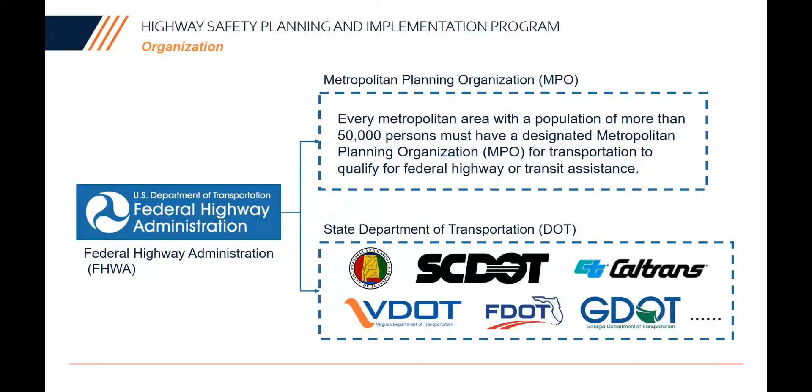So what is highway safety planning? Basically, FHWA, the Federal Highway Administration, requests state DOTs to develop a strategic highway safety plan, and MPOs, Metropolitan Planning Organizations, can develop a specific transportation safety plan. Every metropolitan area with a population of more than 50,000 people needs an MPO. It basically develops long-range and short-range transportation plans and helps distribute federal money to transportation projects.

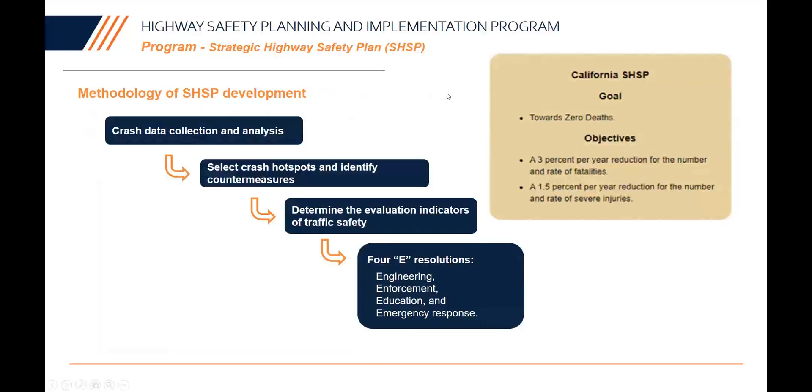Like I mentioned, in this plan they also include driver behavior, distracted driver behavior. So ALDOT actually spent a lot of money investing in the driving simulator study at the University of Alabama. They did a lot of study and training for teenage drivers, distracted driving, how unsafe it is. So that's based on this statewide plan. And you see how the plan is linked to university research.

So another one: if you only have a plan, with no funding, no money to implement the plan, the plan is basically useless, right? So the FHWA actually has a program called the Highway Safety Improvement Program. This program has a budget of about $2 billion US dollars per year. This money is distributed to all the state DOTs, and they use the money to do improvement projects.

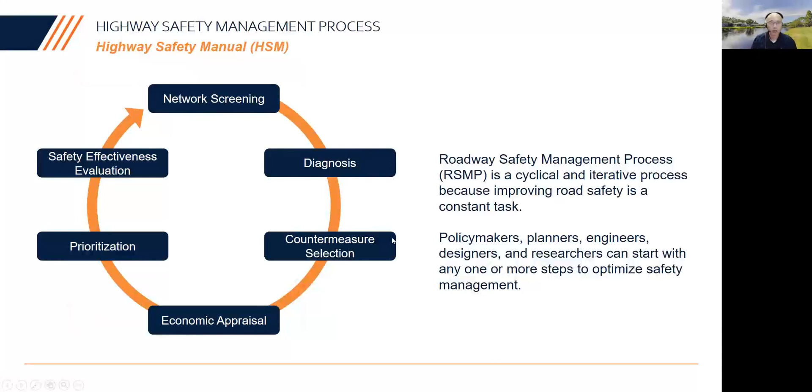The highway safety management process includes this circular process: network screening, diagnosis, countermeasure selection, economic appraisal, prioritization, and safety evaluation. It's like a circle, and as a researcher you can help with any step of this process. For example, if you develop a model to help network screening, or a research paper evaluating a countermeasure, that can help them select the right countermeasures. So this is how research helps the highway safety management process.

So everything I've talked about so far is about planning, the ways of funding, and how these connect. After you understand this planning process and the Highway Safety Improvement Program, where the money comes from, this can help you conduct your traffic safety research. A lot of traffic safety research is performed by universities and research institutes, like CUTR at USF, and large ones like TTI, a research institute and consulting firm. Those research questions and funding sources are closely related to highway safety planning.

I'll give an example. University of Alabama at Birmingham received a lot of money for a driving simulator study because they put that in the state strategic highway safety plan. Okay.

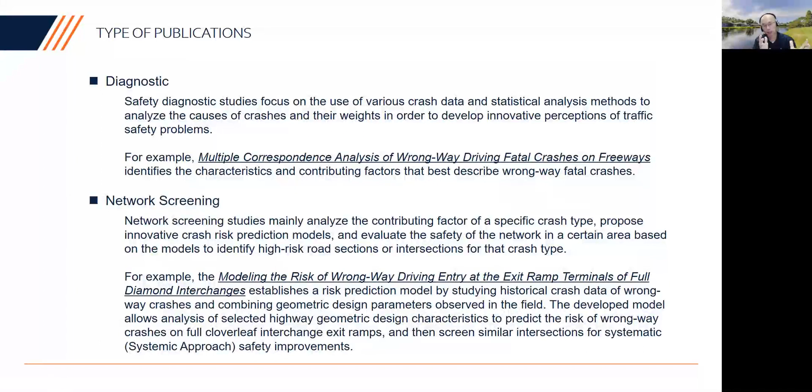So in summary, here I want to mention most of the safety research work. Looking back, I found that it was conducted under the framework of highway safety strategy plan and highway safety management process. In general, both state DOT and FHWA funded research projects place more emphasis on the implementation of the results.

Then next, I want to talk about some future directions. I would say this research area is mostly my interest area - it's not necessarily the future for everybody. It's just some future research I'd like to focus on.

First is the highway safety manual. There's a lot of things you can do for the highway safety manual - you can calibrate the highway safety manual method for your state, or develop a predictive model, and develop a CMF factor. There's a lot of things you can do for the highway safety manual, and you can develop a data-driven road safety management process method, develop a data-driven network screening tool, and effectiveness evaluation.

Or using naturalistic driving behavior data to do some safety performance evaluation, like hard braking and speed trajectory. And you can study how drivers behave at stop signs or on curves and things like that.

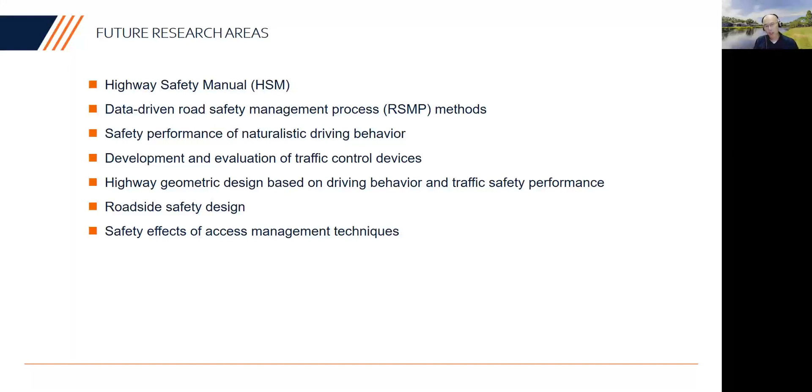And the last one is access management, safety impact. I like to talk about it because every one of these research areas connects with TRB committee.

TRB committee—every time I attend the TRB meeting, I spend most of my time with committee meetings. My first 10 years going to TRB, I spent most of the time attending the sessions and posters, but now I spend most of my time with committees, because committee is the real problem.

They help identify research needs, what kind of research needs to be done. They also stimulate needed research so they can disseminate the research results. They can also identify and share best practice, and facilitate adoption of research into practice.

So the committee—look at the committee members—not a lot from university, a lot from state departments of transportation, a lot of practitioners, and they know what they need. They know their job, what kind of research can be implemented, how to make it useful, converting research to practice.

So these are some standing research committees: traffic control device. I'm now serving as a committee member for the traffic control device committee. This committee deals with a lot of everything—traffic control device, material, installation, operation, maintenance, service life, human factor, and the safety effects of all these devices.

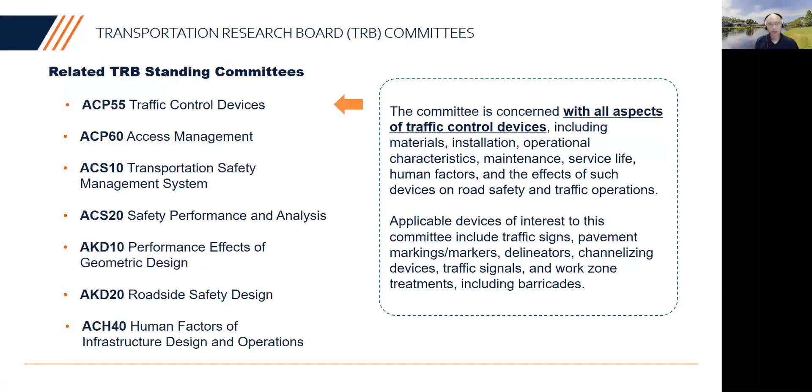The next one is the Access Management Committee. I served this committee for 9 years. I finished all 9 years with this committee last year.

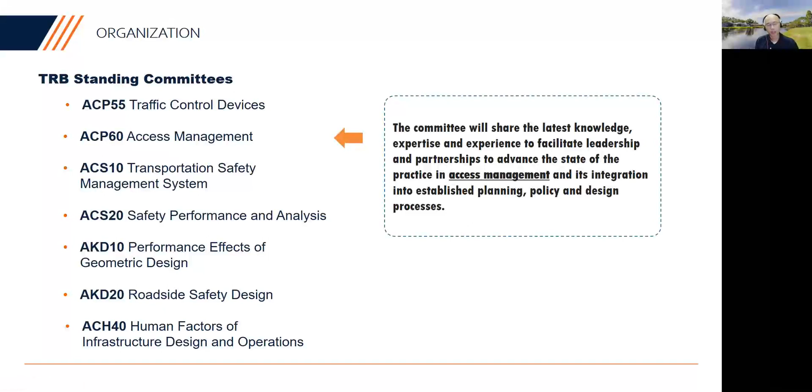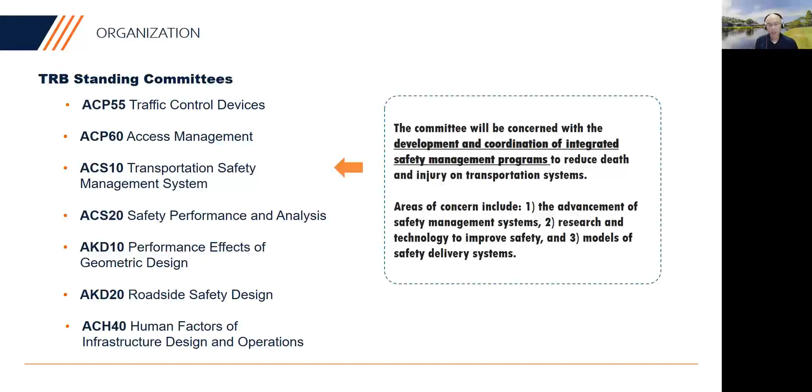The next one is about transportation safety management system, and this one includes all the things I've been talking about: network screening and countermeasure effectiveness—a lot of these steps are included in this committee. The next one is basically safety performance analysis.

This is a big committee, and this committee deals with a lot of Highway Safety Manual research needs.

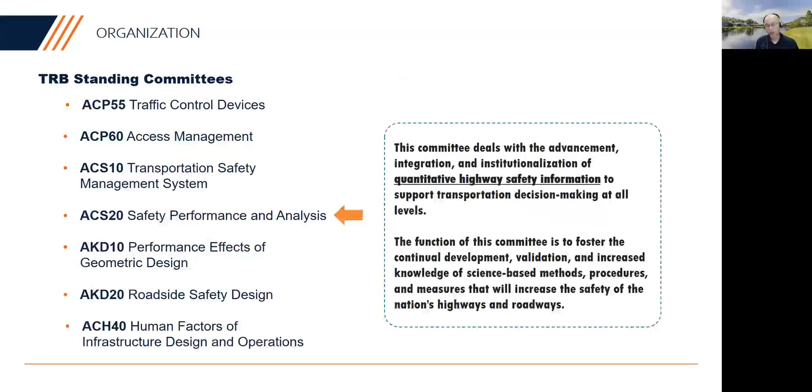The geometry design is also a big committee. It deals with all the AASHTO Green Book related geometry design—left-hand and right-hand sight distance, all these kinds of things, design control factors.

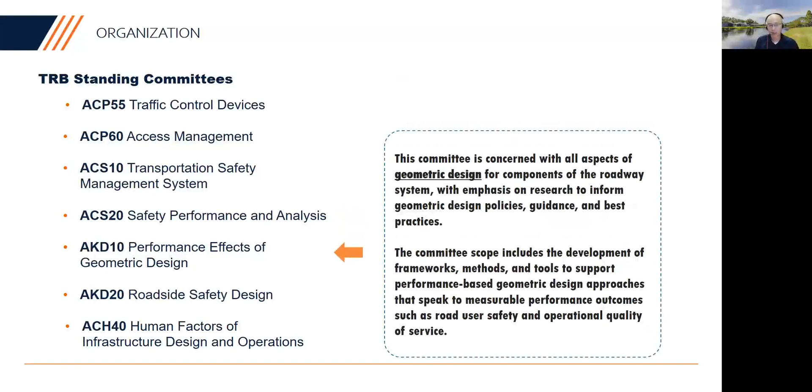Roadside safety design deals with all the barriers, anything on the roadside—cable barrier and all kinds of things on the roadside—to prevent and reduce the severity of roadway departure crashes.

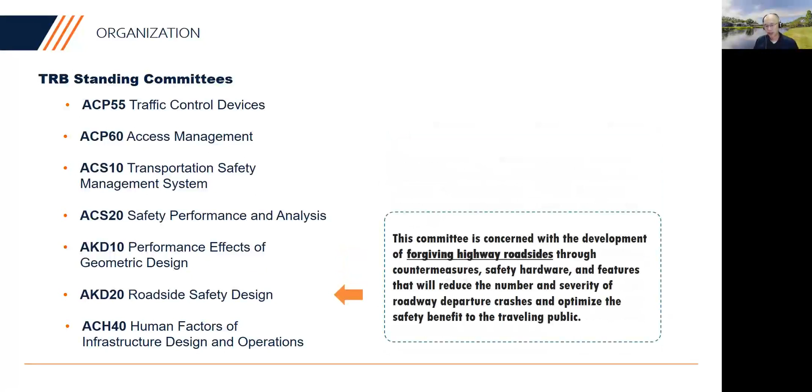The last one is human factor of infrastructure design and operation. This committee is relatively new, and is trying to use the human factor approach to help infrastructure design and operation.

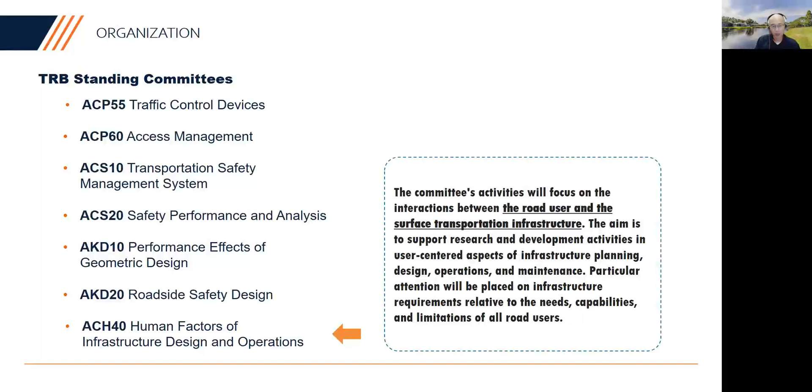I've been involved in all these committees to different extents, different levels. This is a place I typically go to during my TRB visits, and I feel I learned a lot from all the committee meetings—what the research needs are and how things go.

What is future research? Other things I want to talk about are other organizations that do research on safety. One important one is NHTSA, the National Highway Traffic Safety Administration.

This organization is mainly focused on safer cars, like autonomous vehicles. They also do crash testing, a lot of things related to the car—seatbelt and airbag, all the sensors, and connected vehicle research. They deal with a lot of research related to the vehicle, safer vehicle.

This is another organization I've been involved with a lot over the last 10 years: American Traffic Safety Services Association. Their majority members are private companies, like 3M, which is a big part of this organization because 3M sells a lot of pavement marking material. A lot of private companies develop a lot of new products.

They're also very active with TRB. One thing I want to point out is every year they have a traffic control device student challenge. They invite high school, college, and graduate students to develop new ideas for traffic control devices. This year it's about improving safety for vulnerable road users—mainly pedestrians and bicycles—what kind of traffic control device can help improve safety for pedestrians and bicycles.